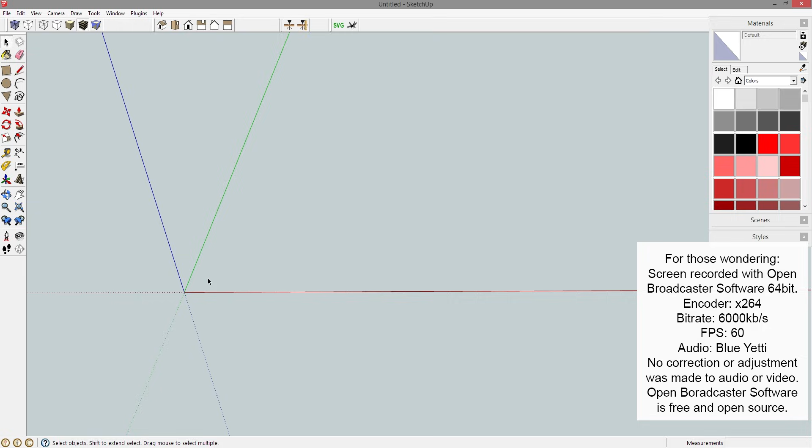The most common question I get asked by far on SketchUp is how to make a cut list or a layout, or how I make them. What I do is I manually move all of my parts onto my own custom layout once completed. It sounds like it takes a long time, but it really doesn't, and you get better results than using the cut list plugin for SketchUp. I don't use that. It's flawed. I don't like it.

So let's first draw the trays that I'm going to make. This is all 1/2" plywood. So R for rectangle from the origin, and let's draw a rectangle. The second dimension is my longest, so let's change those dimensions to 16, 22 and 11/16. That's the size of the bottom panel for my first tray, my largest tray.

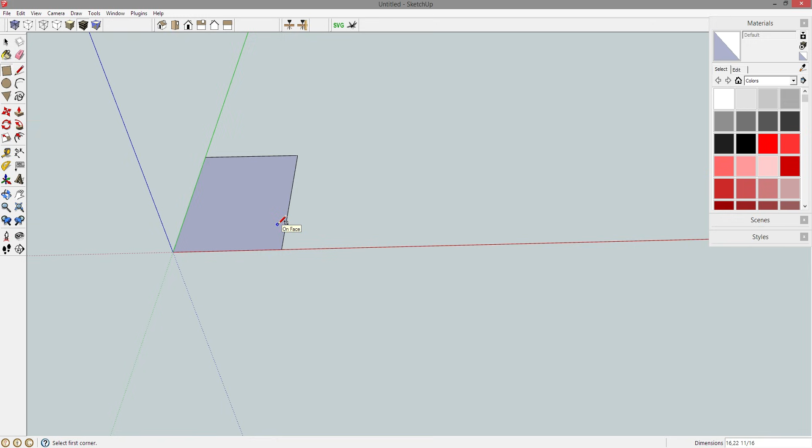P for push pull, and let's pull this up 0.5 inches, enter. Spacebar, triple click. G for component, enter. Now this is 1/2" plywood, which is technically something like 15/32 or whatever it is, but in SketchUp, I always used the 1/2" dimension. Same with 3/4 plywood, I always use 3/4 inch plywood.

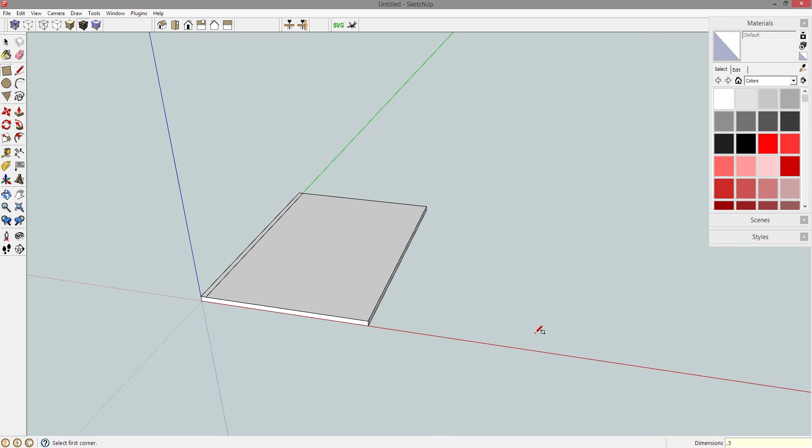Let's draw the sides real quick. R for rectangle from this corner to this bottom edge. The second dimension down here is my shortest of the two, so let's press comma 0.5 to only modify it, enter. P for push pull, let's pull this up 2.5 inches, enter. Spacebar, triple click. G for component, enter.

That side is the same as the other side, so let's press M for move. Control brings up copy, and click and drag to that side. Never draw what you can copy. It's always faster. The vast majority of the time it's faster.

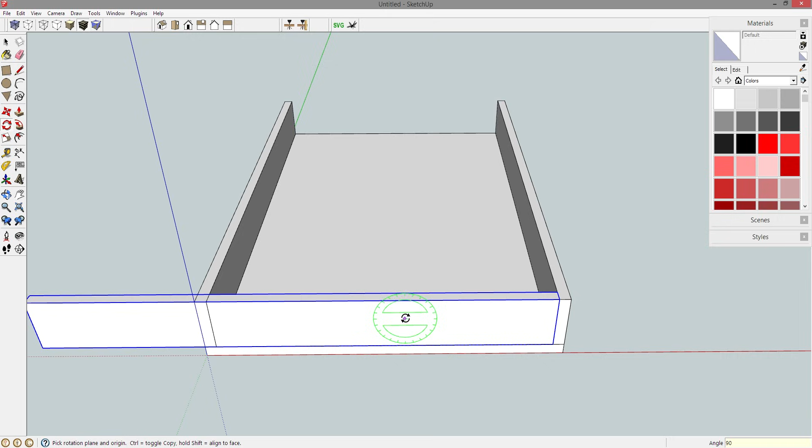So in that same notion here, let's press Q for rotate, and starting at this bottom, let's go this direction. I'm going to press Control to bring up copy, type in 90, enter, and that'll make a copy 90 degrees, because this particular part is the exact same shape as this part, except it is a shorter distance.

So before I modify this for the distance, let's right click and say make unique. You are no longer a copy of this. Spacebar, double click to edit the part, and I only want to select this face that I cannot see.

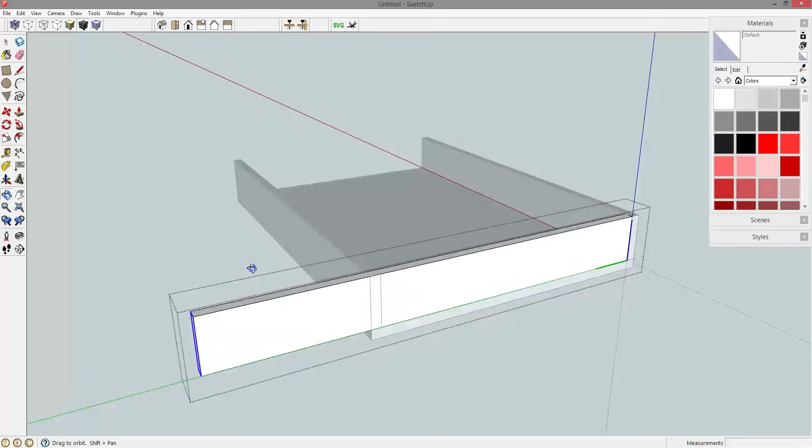And you can do that a couple ways. You can go over here and click on it, or what I find to be easier is to use a window. So if you click and drag left to right, you get a solid box, or a solid rectangle, and that means it is a window. Whatever geometry is 100% inside that window will be selected. All of these horizontal lines and faces and such, they're not 100% inside this box, so they will not be selected. If I let go, only that particular face and this perimeter is selected. And that's a window, dragging left to right.

But if you drag right to left, the boundary box becomes a dashed line, and that is a crossing, which means anything that is 100% in the area is selected, and also anything that crosses the perimeter is selected. So all of these faces right here that cross these dotted lines, as well as the actual edges, they will all be selected if I let go. There you go. Everything minus this face over here. So that's a window versus a crossing.

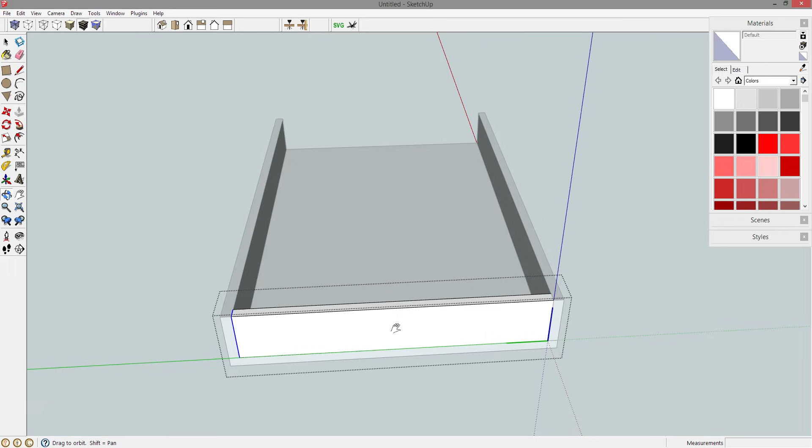I'll use a window to select only this face. P for push pull, and I mentioned that because I'll use it a couple more times here. So I bring it back over here. Spacebar, click to get out. The front piece is the same as the back piece, so M for move. Control brings up copy, copy it to the back.

So this is my first tray. It's the largest tray of the three that I'm going to make. But the geometry is the same, just minus a couple dimensions. Just a couple dimensions are changed. So let's use a crossing to select everything but this right face, or this right side.

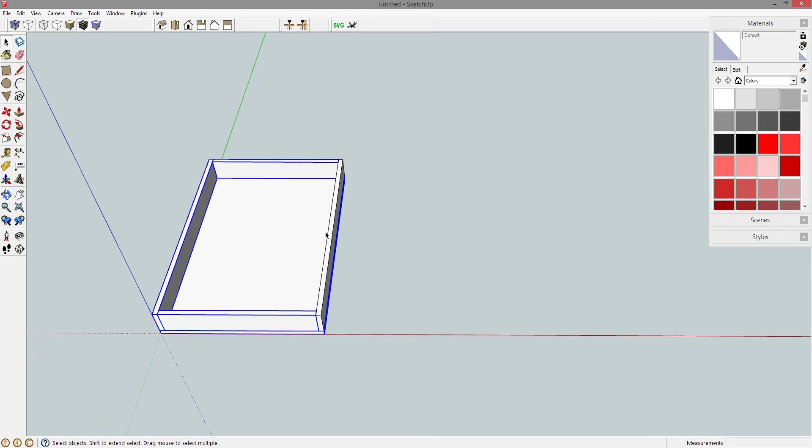M for move, control brings up copy, and let's move this over to here. Right click and say make unique. This group of parts is separate than this group of parts, so if I modify these, it won't modify them.

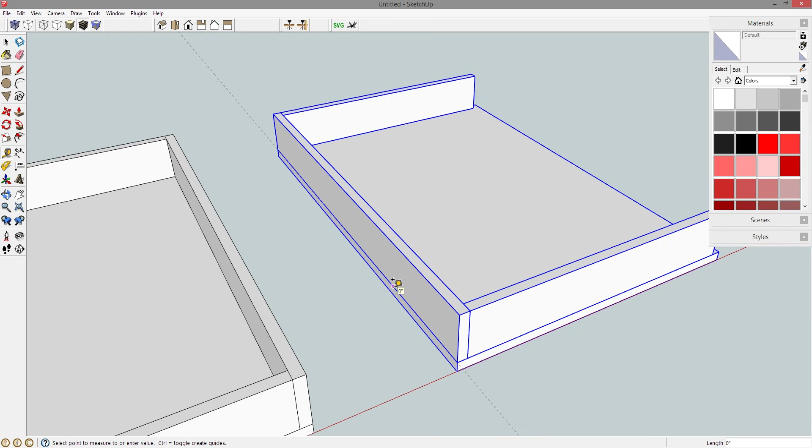This particular bottom piece is, what was my dimension? This one's 9 inches long or wide, so I press T for tape measure, referencing off of this edge right here, this direction, 9, enter. Spacebar, double click to edit the bottom tray, and I'll use a window to only select that face that I cannot see.

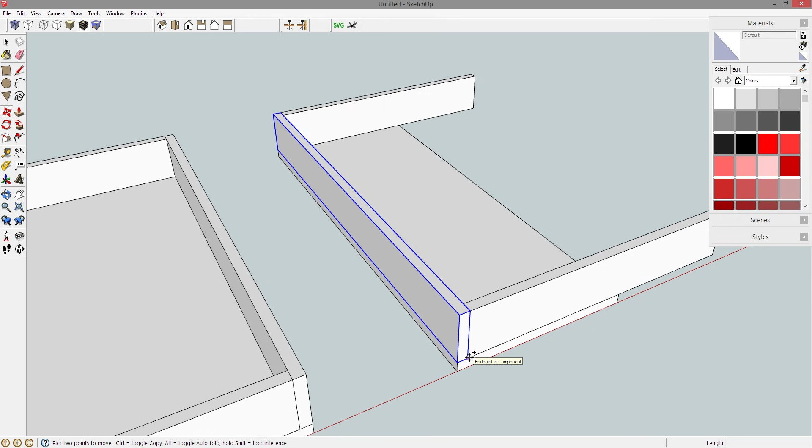Push pull, grab this edge down here, and go this direction to my guideline right there. Spacebar, click to get out, and let's delete this guideline. The left side is the same as the right side, so M for move, control brings up copy, and I'll grab this bottom right corner and drop it off right where it needs to be over here.

As you can tell, the front and back pieces are too long, so spacebar, double click to edit the part, use a window to select the face that I cannot see, push pull, and pull it back to where it needs to be. Spacebar, click to get out. So that's my second tray.

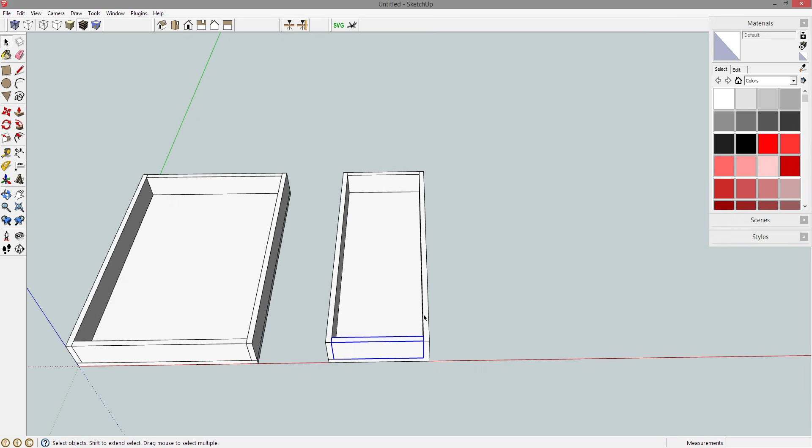My third tray is yet another size, and I'm going to have to recreate these two faces, or these two parts. So I'll use a crossing to only select these three, the bottom and then top and left. Move, control brings up copy, and copy it over there. Again, never draw what you can copy. It's always faster to do it that way, the vast majority of the time.

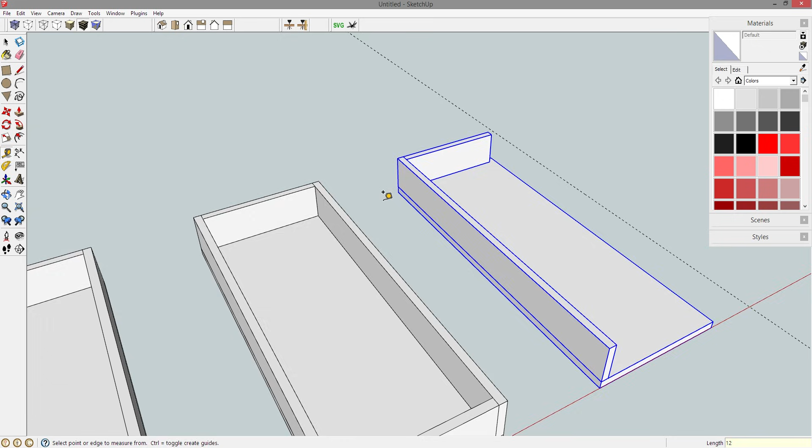Tape measure along this edge, and I'm going to go this direction. 12 inches for this tray. Enter. And top to bottom, I'm going to go from here down. This is, what was my measurement? 9 and 7/16. So now this corner needs to be right here.

Spacebar, double click to edit my part. Use a window to select the face that I cannot see, push pull, and I'll pull it back. Oop, you see what I did there? I forgot to make this unique, so it's updating this right here.

So let me back out of here. Select these three, right click, and say make unique. That way you no longer update this.

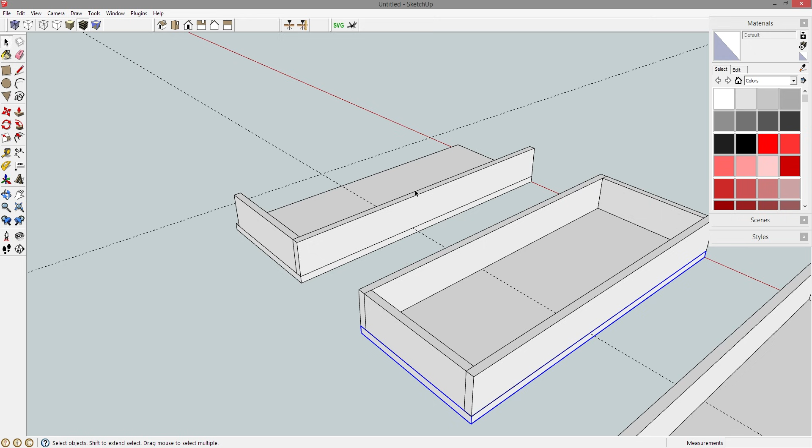Now I can double click this bottom over here. Grab that face that I cannot see with a window, push pull, and pull it back down to this edge. Spacebar, use a window to select this other face that I cannot see, push pull, and just push it up to this intersection where this other guideline is. Spacebar, click to get out of my part, and that's the third tray shape.

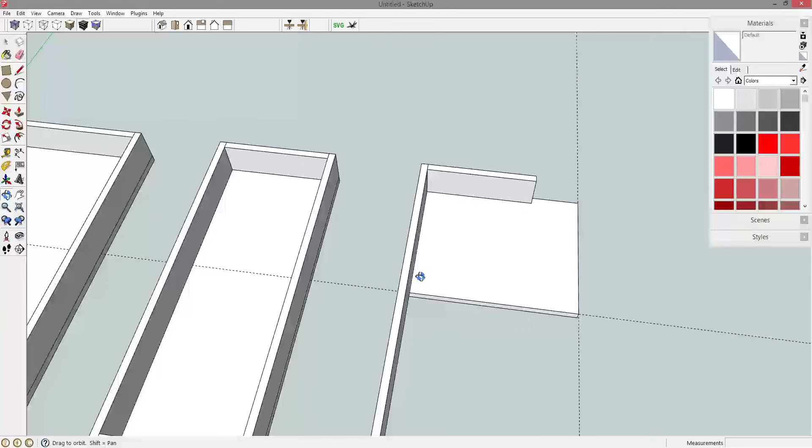Same as before, let's double click this to edit it, push pull, and let's push this where it needs to be. Spacebar, click to get out. It's a lot of repetition here, but let's click on this side. Move, control brings up copy. The left and right are identical, so let's drop it off right there.

Let's double click this back piece, use a window to select this face, push pull, and let's push this where it needs to be. Spacebar, click to get out of your part.

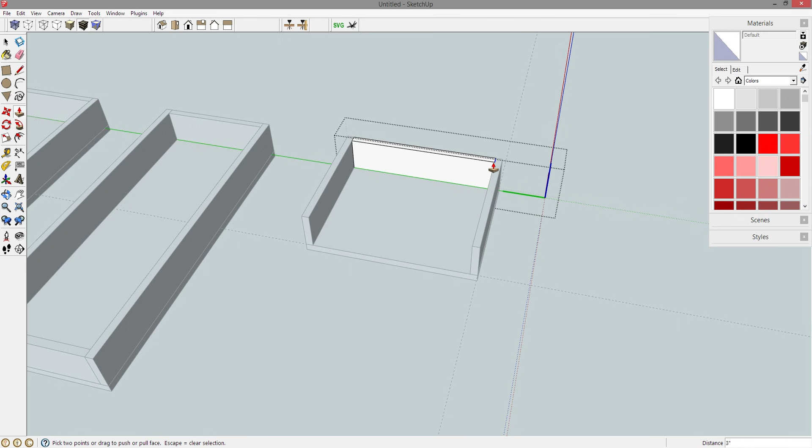Click on the part again, move, control brings up copy, and let's slide it, whoops. Move, grab this corner, control brings up copy, slide it where it needs to be, and I can delete my guidelines. So if I zoom out, that is the shape of, or that's the size of, all three of my trays that I'm going to complete.

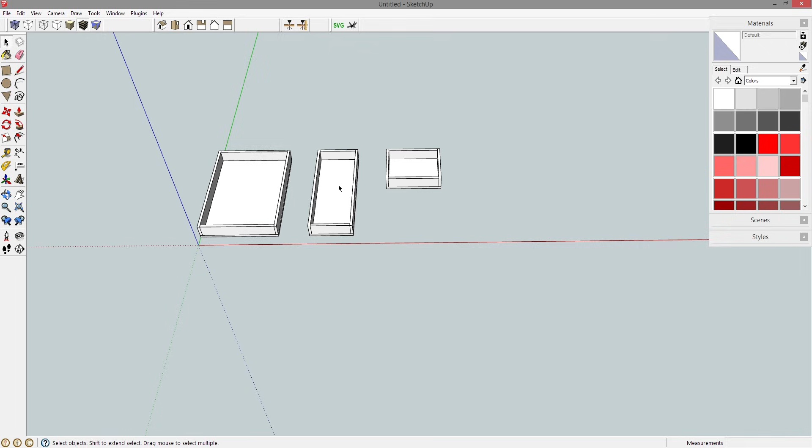How do I turn this into a cut list? Well, let's just move these a little bit away from the origin. And just to distinguish tray 1, tray 2, tray 3, I'm going to make these different colors. So this tray is red, this tray, and I'm using my materials by the way.

It's either window materials or press B for bucket on the keyboard right there. It'll bring up this materials window, and I'm just using colors to distinguish. So we already did red, let's do green. Select the third tray, and let's do blue.

Blue is fine. Let's draw the piece of plywood on the red-green plane, and let's drag it and drop it. My first dimension is the longest, so let's press 96, 48, enter. Zoom out a little bit.

Spacebar, click the middle, and delete it. I don't want that middle plane, I just want this perimeter boundary box to represent a sheet of plywood. I don't want to accidentally modify it and move the pieces as I'm moving stuff around, so let's make this a component. Let's triple click to select all the joining components here, or joining pieces of geometry. G for component, enter. So now all of this becomes one, and I won't accidentally distort the shape as I'm working with this.

I want to move or turn off the axis, so that doesn't get confusing. Now let's move all of the parts into place.

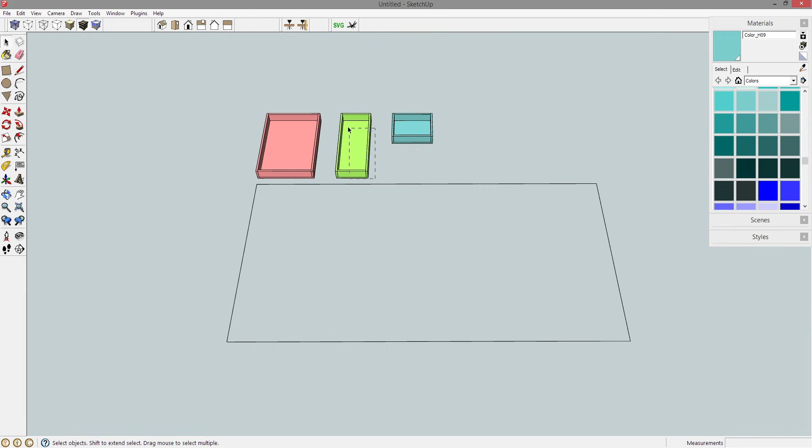I always start with the dimension that is most commonly used, which with all of my side pieces and bottom trays for these two, all of these pieces have that long dimension in common. So I'll grab this first tray, M for move, control brings up copy, and I always like to copy one instead of working off the original, just to keep the original intact. Q for rotate, and let's rotate it 90 degrees so we're working with the first dimension here.

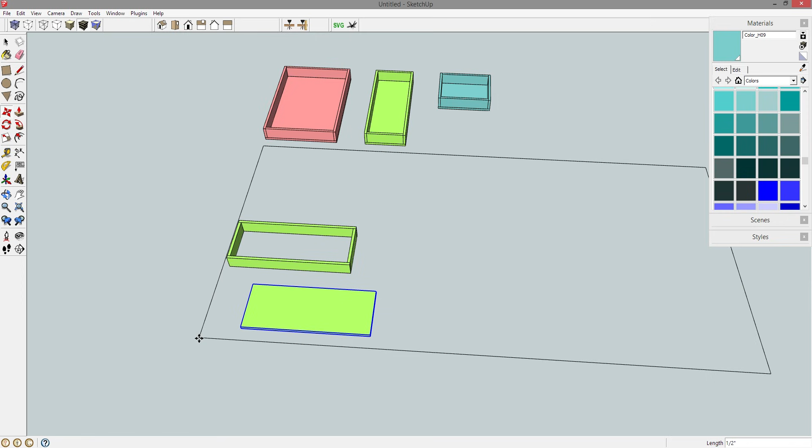Let's select this bottom tray piece and move this corner over to the origin. Sometimes if it won't snap to that piece, what I like to do is press up on the keyboard so it constrains to the blue axis and then references off of that particular plane, and now this should move right into place and snap into place.

Now I will modify, or just rotate these parts into place. Q for rotate, and let's rotate this 90 degrees. M for move, and if it doesn't snap, press up on the keyboard to constrain to the blue axis, referencing off of this plane.

Now that they are in the same plane, let's move them into place. It's much easier once one is in place to press Control for copy and just set one side by side than it is to rotate and move and all that stuff. So let's click on this one and delete it.

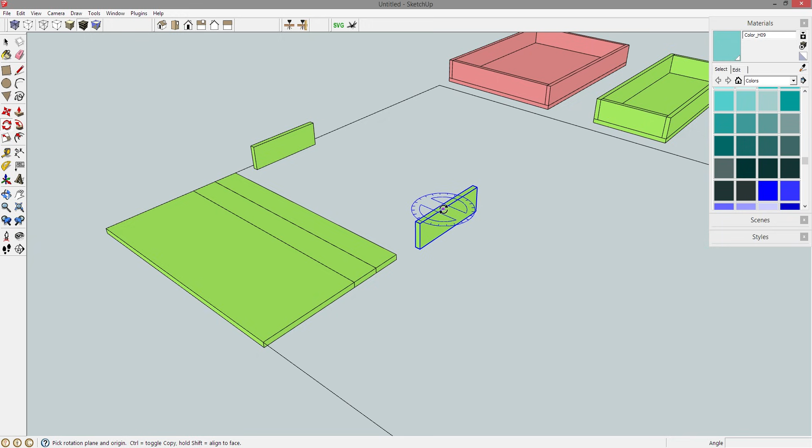Same with these pieces. Q for rotate. Let's rotate this 90 degrees and go along the red side over here. 90 degrees, M for move. Will it snap? No, it won't, so press up and reference off of that. Now let's bring it to the corner. Control brings up copy, let's set one side by side and delete this.

So like I said, this sounds like a lot, but it really reduces time for me in the shop, as figuring this out in SketchUp is much easier than pen and paper for me. May not be for you, but this is my process.

We've got one tray in place. I want two, so let's select it with a crossing. M for move, control brings up copy, and there's two trays. Visually I can tell that this one's not going to fit right there, so let's go to this one. M for move, control brings up copy. I only want one of these.

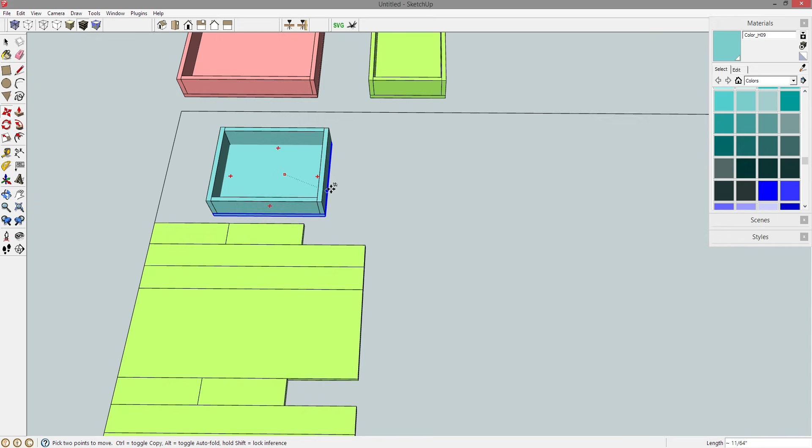Right off the bat, let's bring this bottom piece, M for move, constraining to the blue axis by pressing up, and let's put it on the same plane. Let's select this corner over here, put it in place. I can visually see automatically that if I stack the rest of these pieces, I'm going to be too high over here on this sheet of plywood. So let's stack them in this direction.

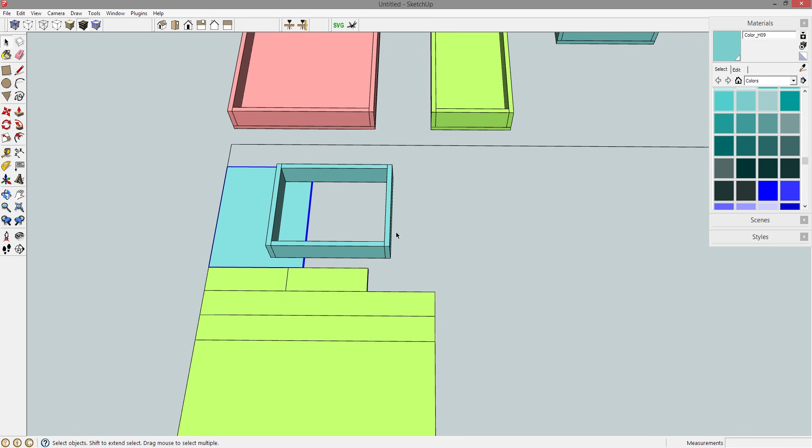So let's Q for rotate, rotate it like so, M for move, and put it into place. Now we can build out this direction. Grab this piece right here, it's the longest of the two remaining pieces, so let's rotate it 90 degrees.

M for move. Grab this face, press up to constrain to the blue axis, and drop it off on that particular plane. Set one in place. Control brings up copy, there's two. Let's delete the other one. And Q for rotate, let's put this one into place.

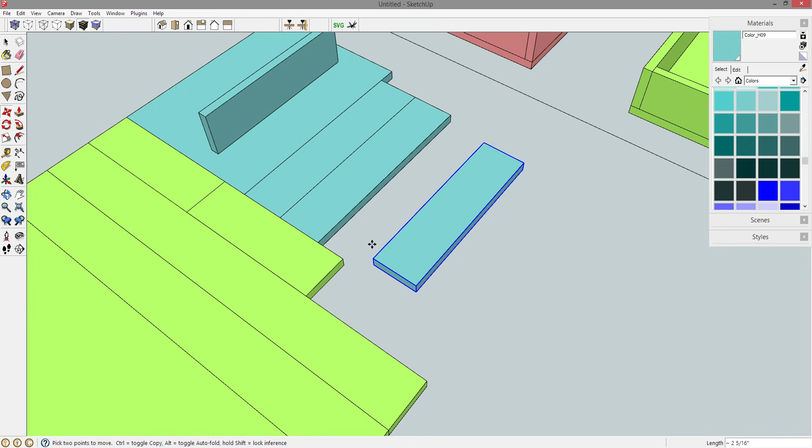90 degrees. M for move. And press up. There you go. Like so. Copy another one like that. And that is the third tray in place.

Still want one of these. So let's bring this, M for move, control brings up copy down to here, Q for rotate, and let's rotate this 90 degrees. That way I still maintain my same dimension here of 22 and 11/16 and then 22 and 11/16. That wasn't the correct snap right there. But that way I have one strip, two strips that are the same size.

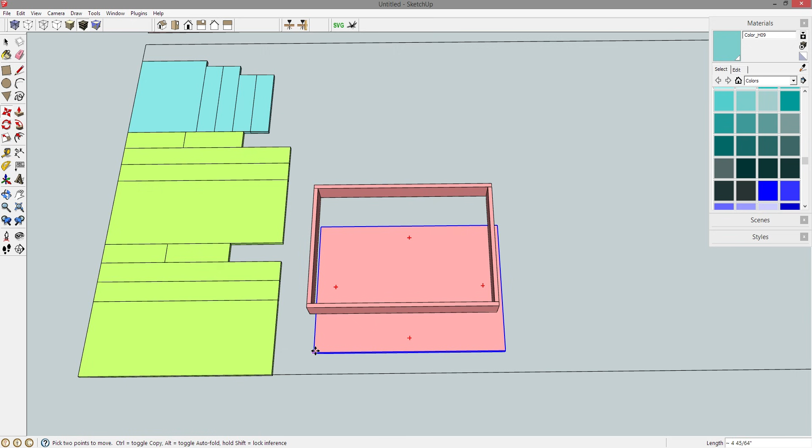M for move. Let's move this into place. There we go. Same process. Let me real quick, Q for rotate, let's rotate these 90 degrees. M for move.

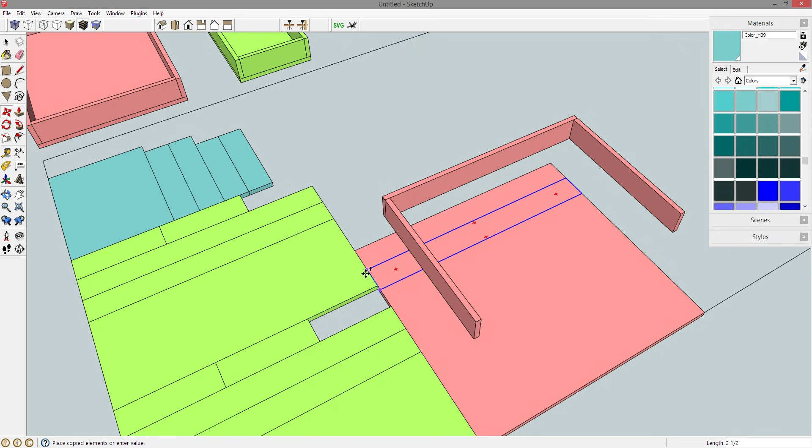Grab this top face, press up on the keyboard to reference off of this face, and move it into place. Control brings up copy, set one side by side. Let's delete the other long one and repeat the process. Rotate this one around and rotate this one around and move it into place like so.

Control brings up copy, set one side by side. Let's delete that. So that's how I make my cut list, or my layout diagram, I should say.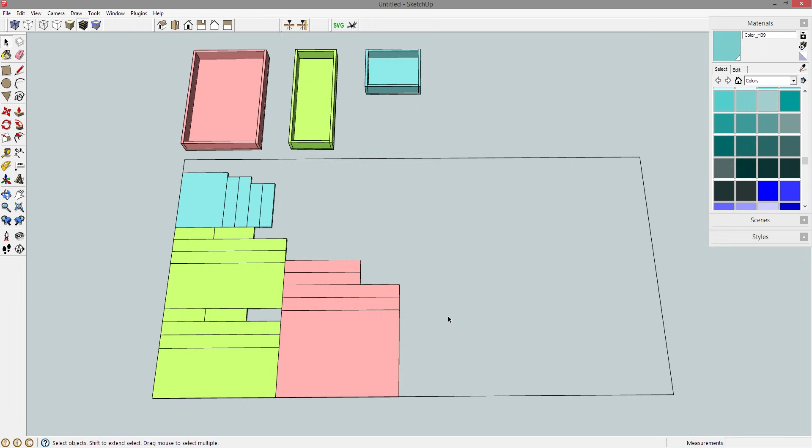But this one can be improved upon. Getting it into place is one thing, but then you get the freedom to optimize it however you want. And I prefer this because it lets me know exactly how I can move pieces exactly the way I want them to be cut out on the sheet, which is beneficial because if in my shop I only have a sheet of plywood that's that big, the cut list plugin will go from a 4x8 sheet.

I think it might be able to modify for smaller sheets, but I like to manually move everything because I get complete control. So this is the first layout, and I like to leave the first layout because I know I can improve upon it just by glancing at this. I've done this enough to determine that I can right off the bat, but that's not always the case.

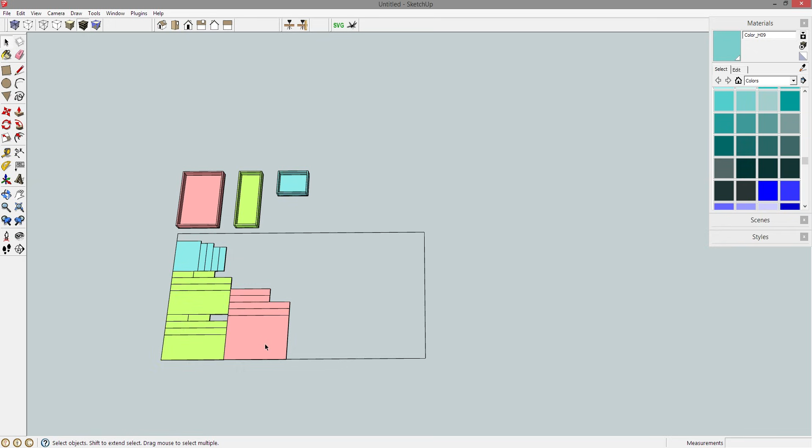So I like to select everything, M for move, control brings up copy, and copy this layout over to here. That way if I move stuff around and it doesn't work out, all I have to do is delete this and I'm back to my original.

Alright, so what I like to do is cut largest to smallest. Let's select all of this, M for move, and move it out of the way. Grab this piece down here, move it into place. Grab this piece and move it into place. Grab this piece, move it into place. Largest to smallest.

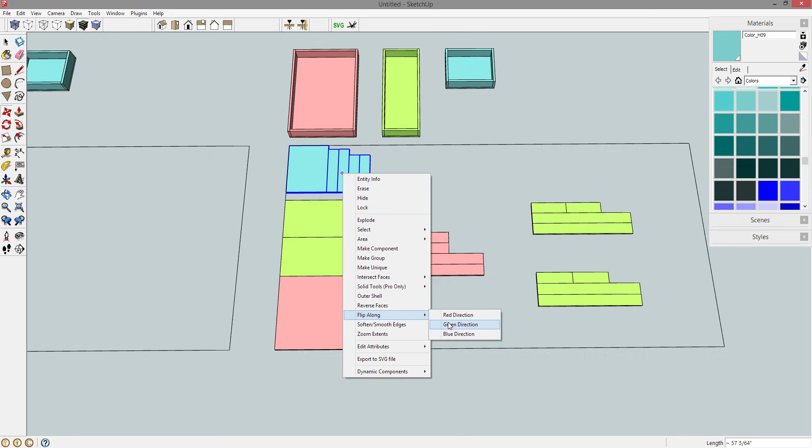I'll treat all of this as a group. So let's just move this over to here, right click and flip it along the green direction. That way all these are lined up into this corner.

So now I can batch all of my skinny pieces, my thin strips here. Let's bring these down, M for move, bring these over to here, grab these, M for move, bring them over to here. I think this group is actually longer than, yep, longer than those. So just making things largest to smallest.

And there you go. That is a much more efficient layout. And what I mean by that is, all right, first off, how would I cut this out?

Let's go get the tape measure, and let's go, this dimension is 45 3/8. I would probably cut this piece of plywood at 46.5 inches. I would use a circular saw to cut this piece of plywood right down this line, leaving me with a much smaller, more manageable piece that I could put on the table saw.

This side up against the fence, and I'll set my fence to 22 11/16, and I'll cut this whole strip out. The fence is still at 22 11/16, then cut this whole strip out. And then I'll work down largest to smallest from there.

So then I'll move my fence to 16, and I'll cut this piece out of this particular strip. Repeat the process with the fence set at 9, cut these two pieces, and then I'll work on this piece here, again going largest to smallest with the fence. So it does go largest, well, minus this 12 right here, but 1, 2, 3, and then this whole group here. Eventually I'll land on this smaller dimension and cut these strips out.

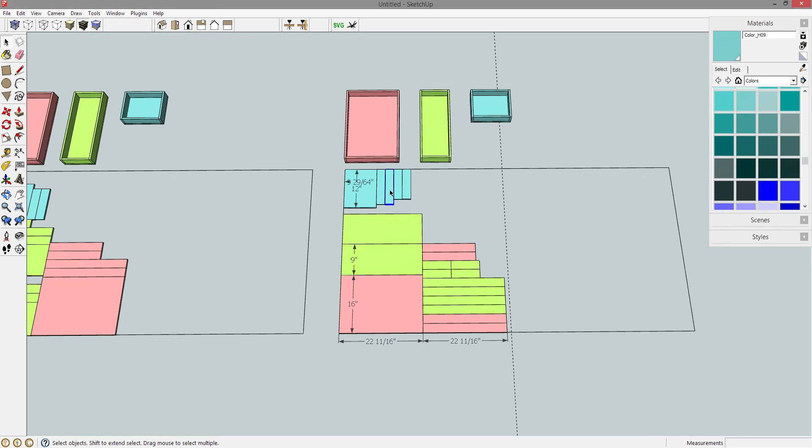Once I'm at this smaller dimension, then I can start batching out all of these strips. It's much more efficient to move the fence as little as possible than this layout, to where I would cut a 9-inch strip, then a 2.5, then a 2.5, 2.5, then a 9-inch, then a 2.5, 2.5. I think you understand the point I'm making there.

So this layout is much more efficient, and it only took just a second to complete. And this whole process only took, I don't know, a couple minutes, 15, 16 minutes to figure this out and get it down perfectly with all of my pieces right where I need them to be. So I personally prefer this method of manually moving everything out.

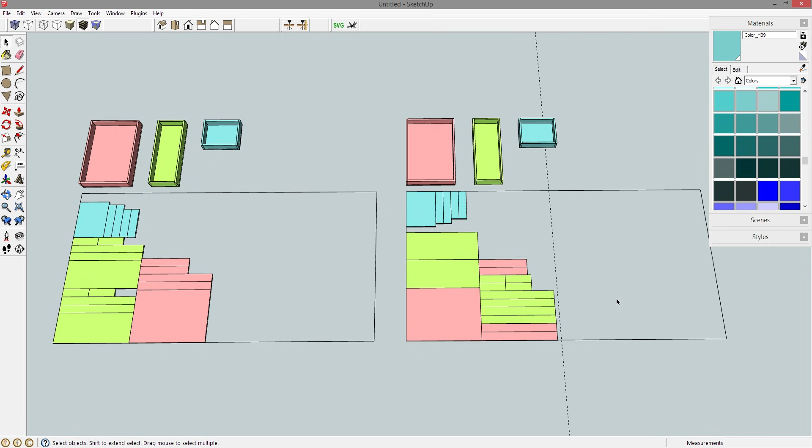If you have a large assembly with a large amount of pieces, then it's just going to take a little bit longer, but it's more efficient in the long run as far as I'm concerned, because I don't have to worry about pen and paper, and I can easily move stuff around. So anyway, that's the process that I take.